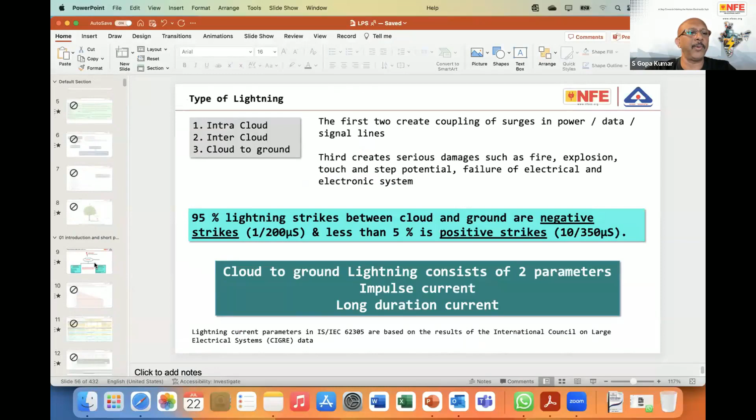So here the lightning protection level, anyhow we will discuss this in detail later. One moment. I have made some small changes, as I said, today because of my change in laptop it's creating some small trouble. Anyhow, let me go through it, then I will come to know.

Type of lightning: first of all, we should understand that there are intra-cloud, inter-cloud, and cloud-to-ground lightning. There are 3 types of lightning. So basically, out of these 3, when we talk about protection of structures, we have to think of cloud-to-ground lightning. The first two, inter-cloud and intra-cloud, create coupling of surges into the power and signal lines. The third creates serious damages such as fire, explosion, touch and step voltages, and failure of electronics. So today's discussion is mostly on cloud-to-ground lightning.

Also, we should keep in mind that 95% of lightning strikes between cloud to ground are negative strikes, and less than 5% are positive strikes. I have put here 1/200 microsecond for the negative strike, and for the positive strike 10/350 microseconds.

When we talk about lightning protection, we always talk about 10/350 microseconds. The engineers always say 10/350 because it's very heavy, very strong, the energy is very strong. It can create a lot of problems, and a normal system may not work in 10/350. All these explanations may be given.

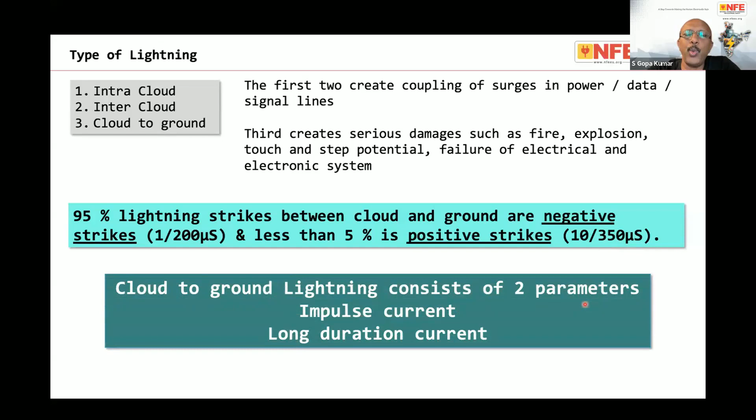Cloud to ground lightning consists of two parameters, or two types. The first one is the impulse current and the next one is long duration current. Impulse current means a current flow for a short duration of a few microseconds, for example, it goes from zero to peak and then reduces back to zero in a very short time. Long duration means the current will be smaller, but it flows for a longer duration.

The lightning current parameters in IEC 62305 are based on the results of CIGRE data. CIGRE, the International Council on Large Electrical Systems, publishes the data, and basically the data in 62305 are from CIGRE data.

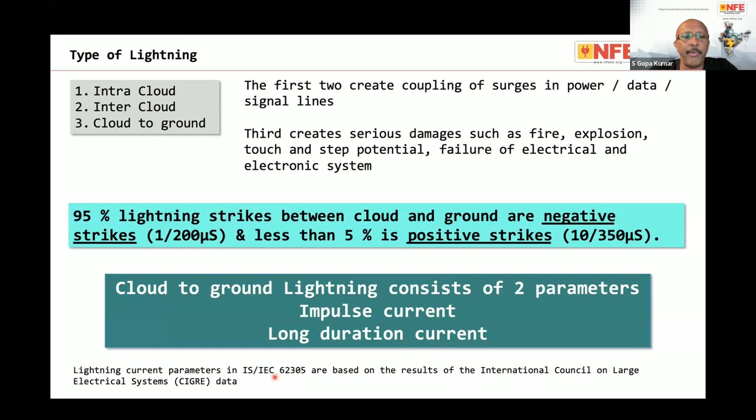Then you can see some of the examples here. All these are going to create trouble in the electrical installation. But today's topic, as I said, is mostly focused towards the building, that means the structure. So some of the examples - also the lightning strike which is closer to the building or closer to a line also creates trouble. These are very well included in the standard.

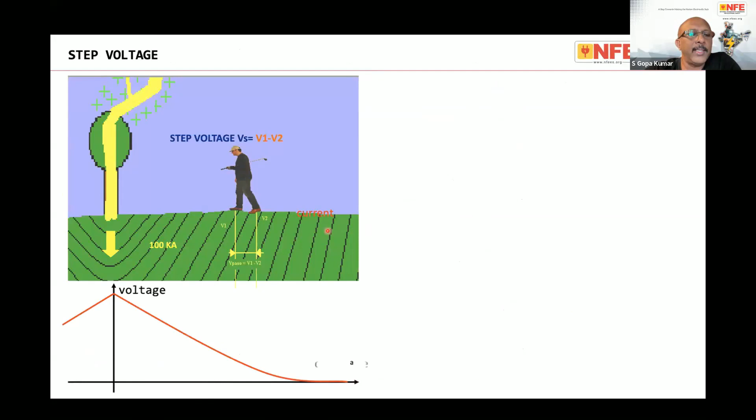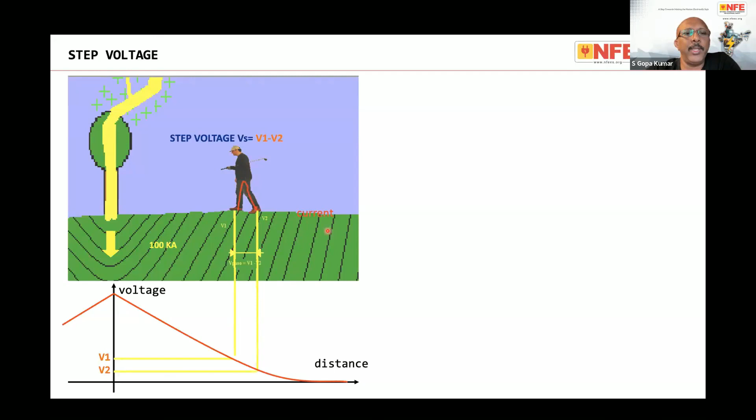Now, with respect to problems to human beings, one is step voltage. Once the lightning current flows through the soil, a voltage gradient is created, and a person standing across this gradient, through the legs, the current may flow. As a result, he may get injured. This is applicable for living beings - all living beings, step voltage is going to be a trouble.

Similarly, touch voltage - if somebody touches a metallic part which is energized due to lightning, and the person is standing on the ground and touching some energized part, the touch voltage will flow through the body and the person can get hurt. So touch and step voltage are the main reasons for accidents to human beings.

However, in our last webinar, we discussed these issues - protecting people outside structures was discussed very well. So today we are not going to explain these subjects. Today our subject is mainly for the protection of the building.

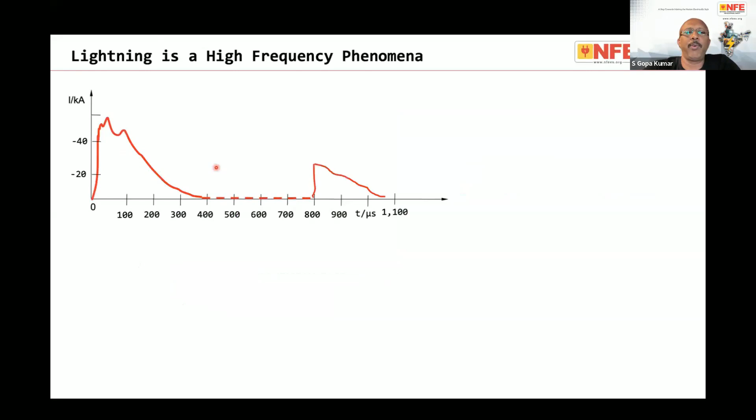A typical lightning strike consists of a main discharge, meaning there is an initial discharge or main discharge where a majority of the energy is discharged. Then after some time, there is a time difference between discharges, and there can be a subsequent discharge. A subsequent discharge means sometimes one subsequent discharge, or sometimes several subsequent discharges up to a maximum of 30. And there are chances where sometimes there is no subsequent discharge as well.

Now, this is the real lightning impulse or real lightning pulse. It consists of a main discharge and probably several, or one, subsequent discharge. Now, when we design a lightning protection system, the most important subject is protecting the building, protecting metallic parts, or protecting the building from flashovers, heating, arcing and fire. Here, the main discharge is the most important, which contains the majority of the energy.

The components used in the lightning protection system, such as the air termination, the conductors used, the earth electrodes or earth termination system, joints, clips, clamps - all those components should ideally be able to withstand the main discharge, because the majority of the energy flows during the main discharge.

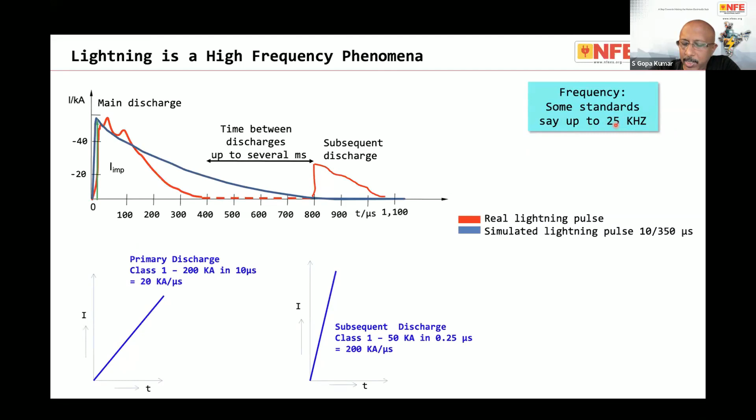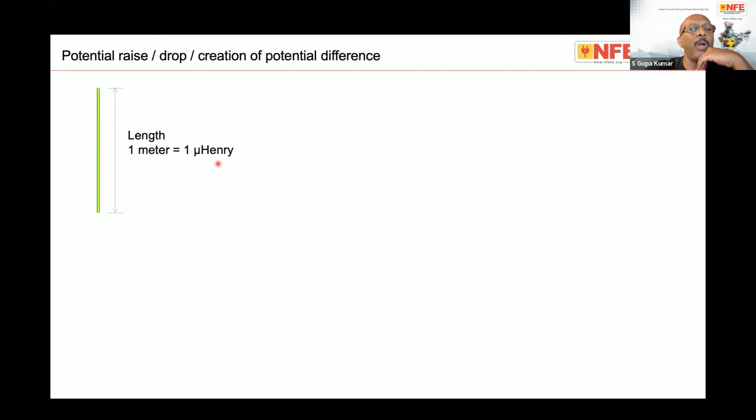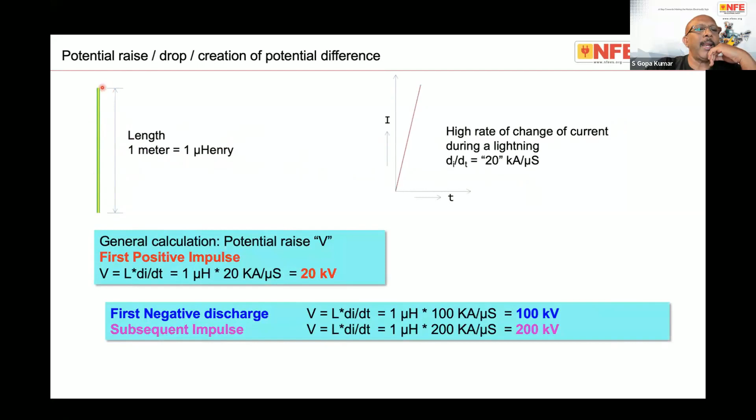Once this current flows through a conductor - I'm just showing a wire, let's say 16 square millimeters of copper wire, or 25 square millimeter copper wire, 1 meter long - this 1 meter wire will have approximately 1 microhenry inductance. Once the current of 20 kiloampere per microsecond flows through this 1 meter wire, a huge potential drop or potential difference is created along that length.

If the current is 200 kiloampere, 10 by 350, then the potential difference across the 1 meter wire length is about 20 kV. And if it's a first negative discharge, the potential difference created is about 100 kV. In case of a subsequent impulse, the potential difference in 1 meter of wire is about 200 kV.

This is just to explain that the longer the wire, the greater the potential difference created in it. So an enemy to lightning protection is more wire length. This is why whatever connection or down conductors you make in a lightning protection system, they have to be as short as possible. If you make a long wire, you're in trouble, because the potential drop in the wire will be extremely high, which will actually destroy the installation.

Basically, transient current flowing through conductors creates a high potential difference, resulting in flashover to other metallic installations - for example, down conductor to steel in RCC and PEB, metal facade, metal doors, power lines. So before the current starts flowing through the down conductor, it actually flashes over to all nearby metallic installations. And if you want to separate or keep the conductor away from metallic parts, you have to calculate distances, and sometimes keep it far away, which is practically very difficult.

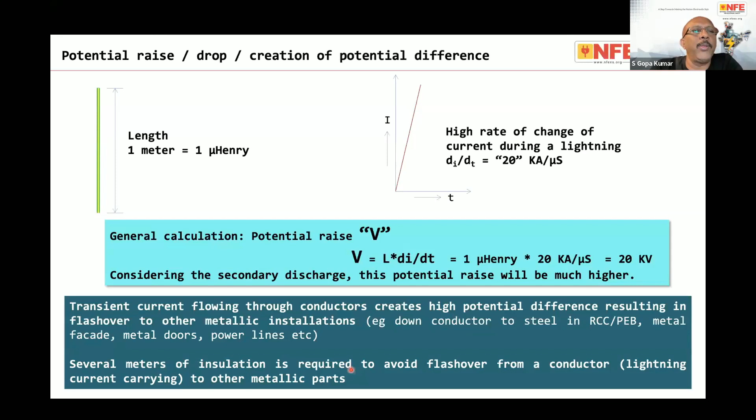So the simple conclusion is: length is an enemy, or wire length is an enemy, to lightning protection. More length means more problem; less length means your lightning protection will be more efficient. This refers to the length of the conductor where the lightning current flows. So once you design a lightning protection system, you should avoid unnecessary routing of the conductor. If you can take the conductor through a straight route, take it as straight as possible, and avoid bending and routing through different parts of the building.

Similarly, when the lightning current flows through a conductor, let's say one conductor, it creates a very high electromagnetic effect. Imagine the complete current is flowing through one conductor - you will have EMI effect, electromagnetic effect, at probably several tens of meters.

Now, if you have two down conductors, the current is divided into two, and the electromagnetic effect is reduced to half, for example. If you have multiple down conductors, let's say 10, the effect is reduced probably 10 times. And if the number of down conductors is, let's say, 100, the effective effect is much, much lower.

So the second subject of lightning protection, while designing, you should always consider that there shall be multiple down conductors. More down conductors is best for the building. The standard recommends a minimum number, but if you can make even more, the electromagnetic effect will be less. Electromagnetic effect is going to hurt your electrical and electronic installations.

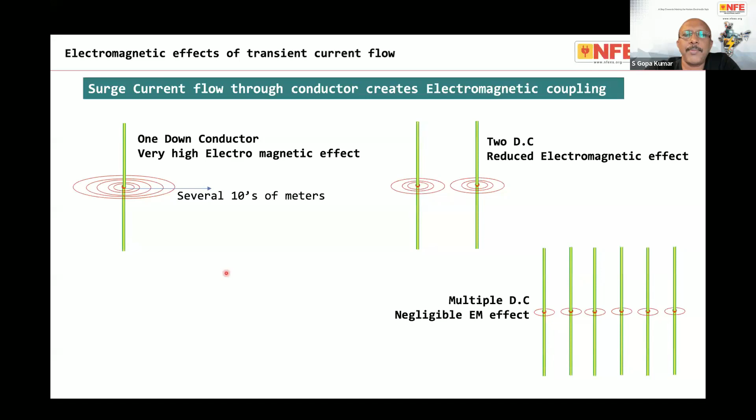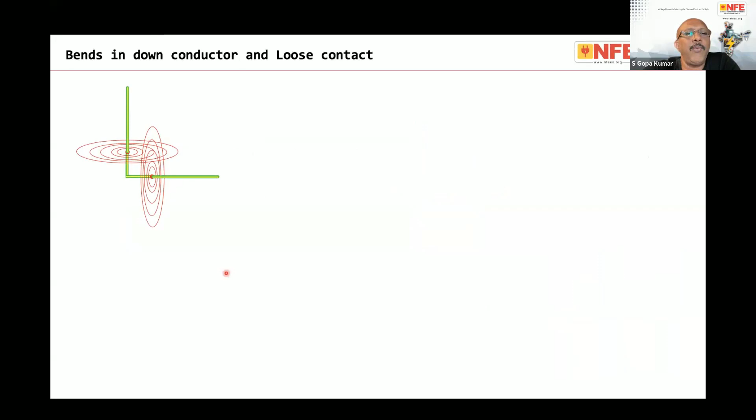So one, more length is a problem. Number two, less down conductors is a problem. Number three, if you have a bend in any conductor, say for example a down conductor, the opposing magnetic field on a bend will destroy the conductor. So bends must be avoided. If you have no other choice and want to make a bend, then...

there are some minimum bending radius we have to calculate and consider very well. If we make a 90-degree bend, even if the bend is made above a brickwork or concrete work, the forces created in this area will be enormous, so it can disturb or destroy the entire concrete as well. This has to be taken care of very well. Bend is an enemy to lightning protection. So the recommendation is to have the conductors as straight as possible.

Then the last one is loose contact. Loose contact will create a big problem. It is not like in 50 hertz AC where loose contact just creates heat. It's not like that in lightning, because lightning has a parameter called specific energy. Specific energy is scientifically connected to the resistance of the joint - a joint resistance of 1 ohm produces an equivalent heat of about 10 megajoules during a lightning current of 200 kiloampere flowing through it. So the amount of heat produced in the joint will be enormous.

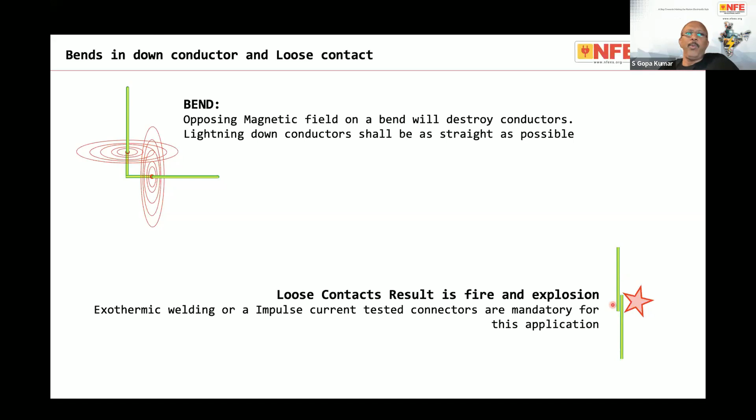Of course, in Cape, all of you know my company is Cape Electric. So in Cape, we have a design team - about 15 or 16 people in our design team, and we do lightning protection design.

So once we get the drawing from the client, we ask a lot of questions to the client, in order to ensure that the design is made in a good way. But most of the time, the clients say, why are you asking so many questions?

Your competitor or the other company, I gave the drawing at 10 o'clock and they finished the design at 11 o'clock and gave it back to me. And your company is taking 3 days or 5 days to make a design. You are lazy, you are very slow. These are the comments we used to get.

But please note that designing lightning protection is not a simple job. We have to really understand it in depth, and then only we can do it. Our engineers are trained to do proper designing. That is the reason they ask questions to the customer or the designer, and try to make a good design. So it may take sometimes 2-3 days or even more.

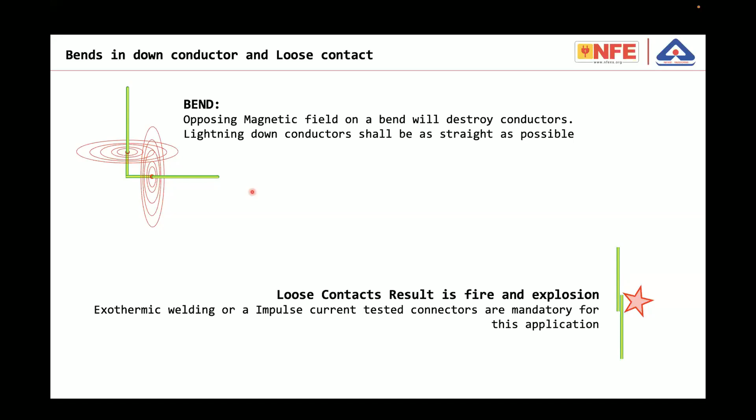So I just try to explain the system with a simple explanation. Not for an engineer, this explanation may not fit an engineer, but this explanation sometimes works for a non-engineer, as well as people who have little knowledge of electrical engineering. So I try to compare. This was made by Professor Chandima Gomes a few years back, I think 15 years back. He was explaining it this way and everybody understood. Then I also started explaining in the same way. Let me try to do it again.

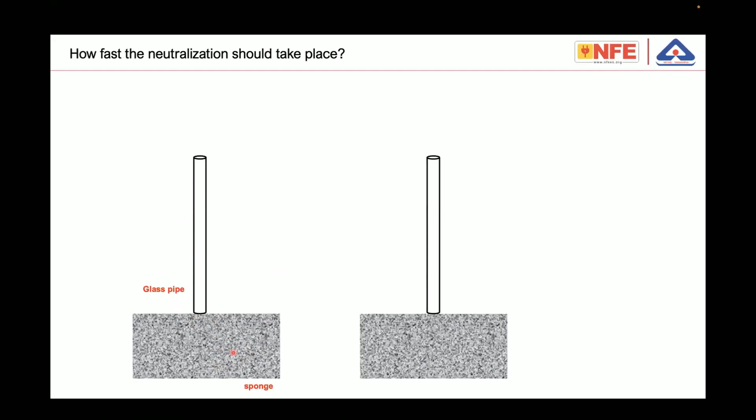Imagine you have a glass pipe, a sponge, and one bucket or mug of water. You pour the water slowly into the glass pipe. So you know what is going to happen. Some of the water goes to the sponge and absorbs it, and the rest stays inside the glass pipe, and after some time the whole water goes to the sponge. It takes some time, probably 10 or 20 seconds, for the water to go to the sponge fully.

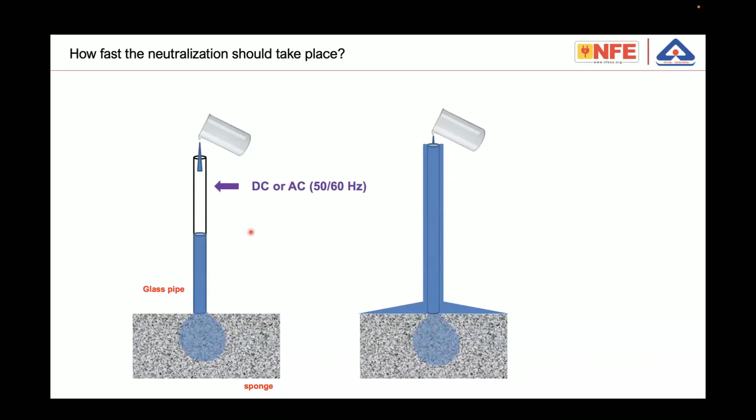On the same sponge and pipe, if you try to pour the water quickly, very fast, then what happens is the pipe overflows. Before the water reaches the bottom, the whole thing overflows, and only a little amount of water goes to the sponge. Most of the water overflows. This is practically what happens in case of a DC or a 50 hertz current flow - the system on the left side, where the current is slower. In case of a transient or lightning, the current flow is very quick, very fast.

The system is not just like what we think. In case of DC or AC 50 hertz current, probably one conductor is enough to carry the current, whereas in case of lightning current, this same idea will not work. In the first case you can see the limited potential rise, and in the second case, where the current flows like water poured very quickly - imagine a transient current flow - unlimited potentials are created.

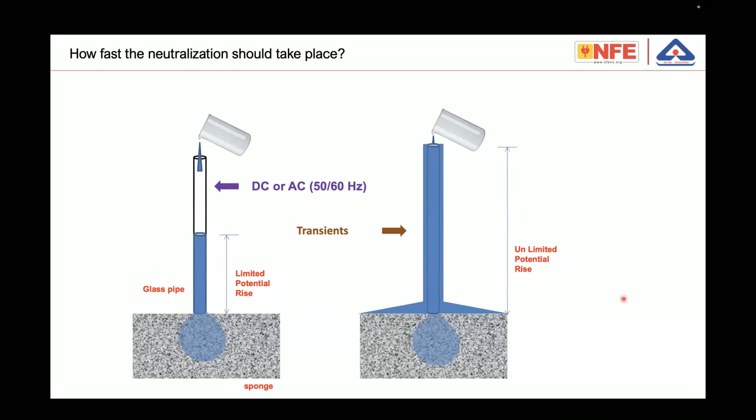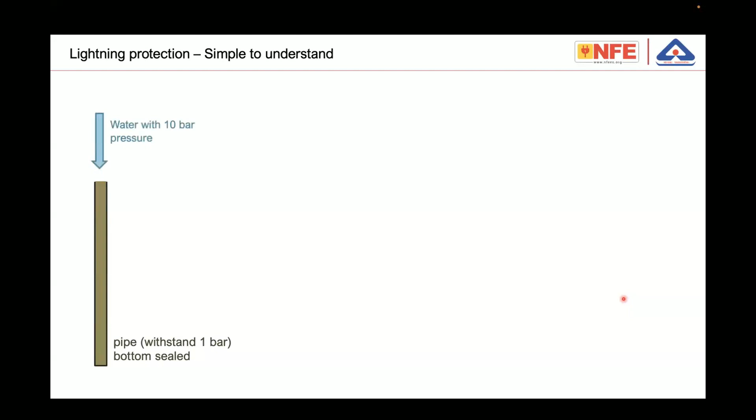So I also try to explain it in another way. Earlier we were doing some classes for school children, where these figures were used, so I will try to explain again. I'm sure all our participants are engineers, but still, just to understand the system: you have a pipe, let's say a plastic pipe, which can withstand 1 bar pressure, and its bottom is sealed. And you try to pour water with 10 bar pressure.

You know what happens - once you pour the water, at the top itself, it explodes. In the second case, the same pipe, imagine there is a small hole in the pipe, but the pipe can withstand only 1 bar pressure, and you are putting water with 10 bar pressure. A little bit of water goes inside, but then immediately the pipe explodes. Third case, the pipe is completely open - you have an open pipe that can withstand only 1 bar pressure, but you are pouring 10 bar water. Of course, the pipe is going to explode.

So these three pictures can be explained in such a way that the first one, on the left side, is like one down conductor used, and the down conductor is not terminated to the earth electrode. Lots of buildings in India have a single rod lightning protection, and most of the time the down conductor is disconnected somewhere. As a result, at the top itself, at the air termination, the lightning current is going to flash over and destroy the whole installation. Similarly, the next one - imagine the single down conductor is connected to the earth electrode, but with a very inefficient connection.

In that particular case, there will be a flashover somewhere again. And the third one, there is a single electrode. Most often the ESE devices which you see in the country have one air termination, one down conductor, and one earth electrode. Once the current flows, the whole installation will be destroyed. There will be a flashover.

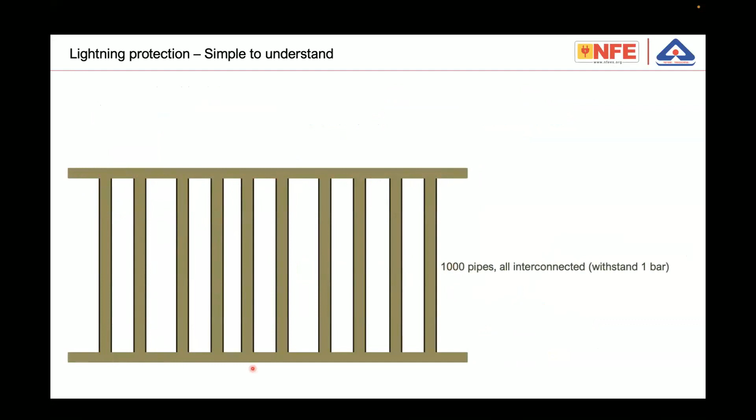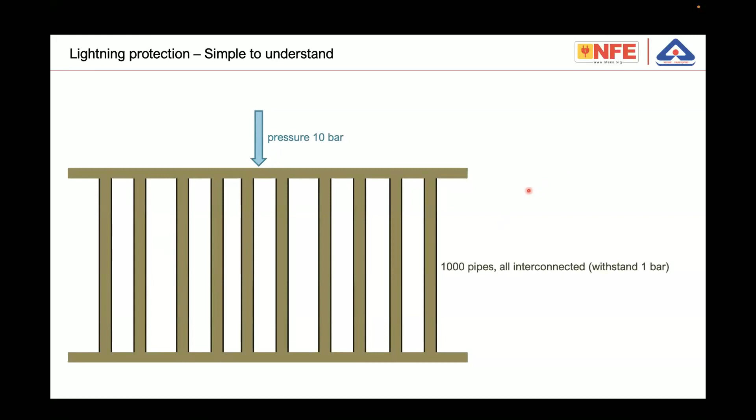So what is the solution? The solution is something like this. Imagine you have a larger water tank at the top with interconnected pipes, these gray ones. Now if you put high pressure water, let's say each pipe can withstand a good amount of water, but the water we pour is limited, only one bucket, not so much. So in this case, a bucket of water will flow through all the pipes, and the chance of damage is very less.

So this can be explained as what we are supposed to do to the system. As I said, this explanation is for school children, not for engineers, but sometimes the questions arise. At the top, you have an air termination mesh plus naturally available steel installation in the roof.

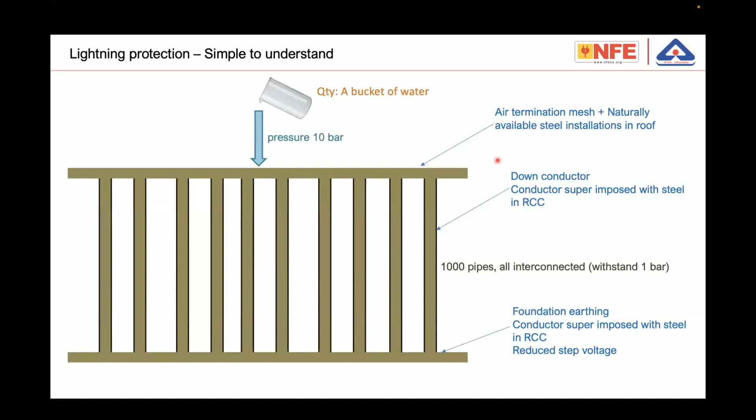So we make a very good equipotential bonding at the top with a lot of metal interconnections. Then there are several down conductors, and a very good earth termination system. Basically, this is achieved by interconnecting different metals. This is the system followed globally as mandatory for the last several years.

This concept means a large air termination system consisting of rods, horizontal conductors as a mesh, everything interconnected. Then there are several down conductors, and finally a large earth termination system, either as a ring conductor or a foundation earth electrode. This is what is explained as the lightning protection system in the National Building Code as well as IEC 62305. But please excuse me, I explained it as an example.

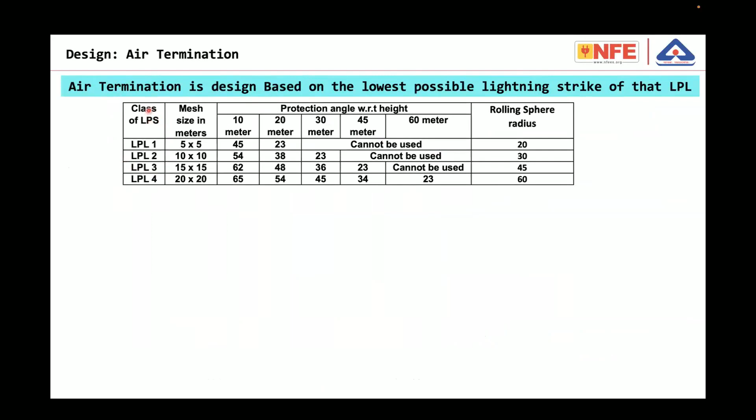Now, air termination. The first job of lightning protection is to design the air termination system. You can see here lightning protection class 1, 2, 3, 4. Air termination is the system or the method or the interconnected metallic arrangement which we make at the top of the building in order to avoid a direct lightning strike into the building.

The first method, in case of a flat roof building, you can make a mesh. The size of the mesh is provided in the standard. You can also go for a vertical rod, which offers a certain angle of protection, not like 200 meters or 100 meters. Each rod offers a certain angle of protection, and you can also use the rolling sphere method.

Once we talk about the rolling sphere method, people always ask, what is the basis of the radius 20 meter, 30 meter, 45 and 60? What is explained in the standard is R equals 10 into I to the power 0.65. This is the rolling sphere calculation included in the standard.

And this I depends upon the charge in the cloud. This I is related to a parameter you can see here: the lightning downward leader comes, then there is an upward streamer or the answering leader from each grounded object, such as a tree, or such as this particular transmission line.

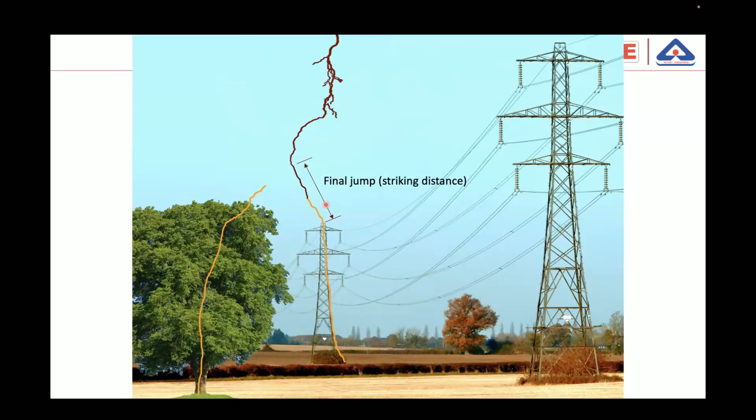Now, the lightning strike gets connected to the transmission line, and the final jump is called the striking distance. The rolling sphere or electrogeometric modeling is made based on the assumptions or calculations of the striking distance, which is calculated based on the charge or the expected lightning current, let's say for example 200 kiloampere. If we apply that formula, we get the value, and based on the striking distance, the rolling sphere radius is calculated.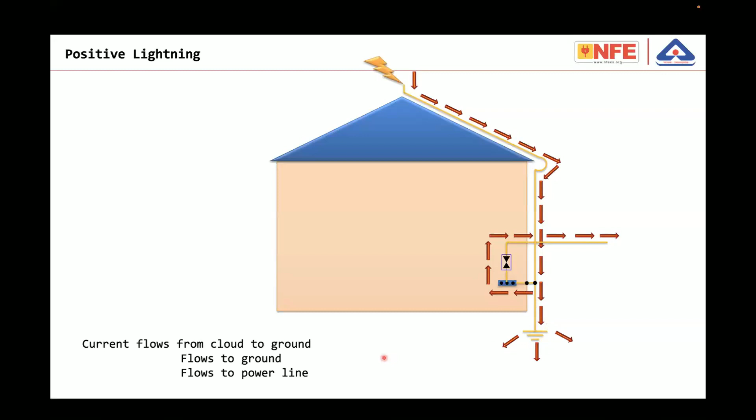Now, positive strike, just as an example, because people always think lightning current comes from the cloud and goes to ground, but actually it is not always like that. In a positive strike, the current flow will be from the cloud to the ground, and also from the place where lightning struck to all the metallic installations connected to that structure. The direction shown is just an example. Similarly, in a negative lightning strike, the current flow will be opposite. Sometimes people try to explain that you need one SPD for one direction and another SPD for another direction. These are actually wrong.

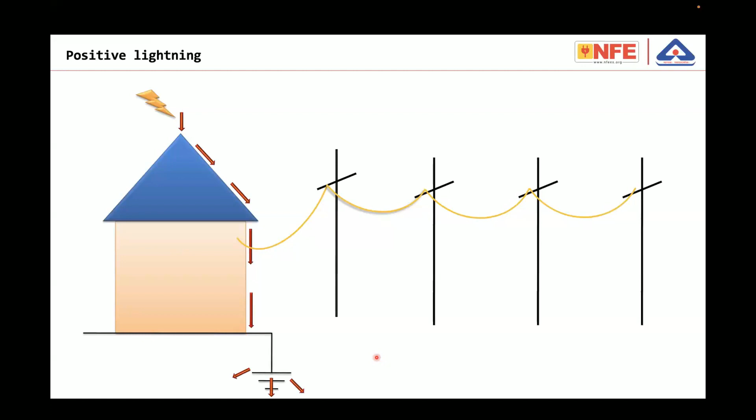The devices and components used in lightning protection are capable of handling current flow in both directions. Positive lightning current flows in one direction, negative in another. Looking at a building with a lightning strike, the current flows to the ground and to connected services, flowing outward to nearby buildings. In case of negative strikes, it is the opposite. So with positive and negative strikes, you must be careful, as the current flow direction is opposite.

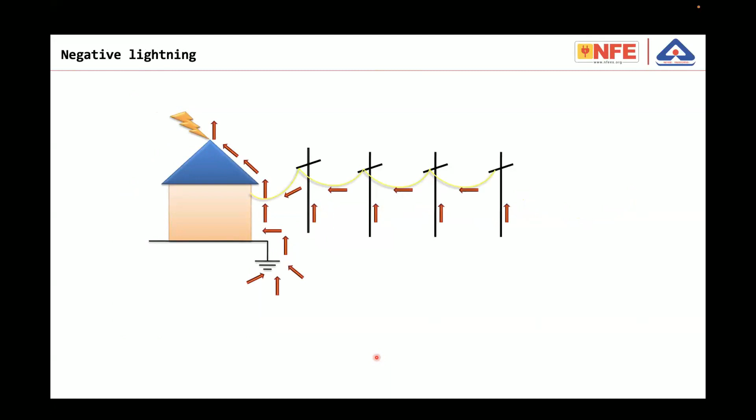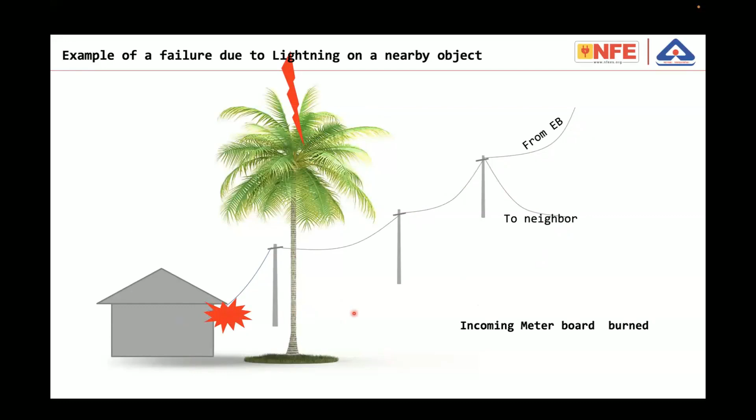Consider lightning striking into a nearby object. There is a building with a low voltage line connected, typically applicable to low voltage consumer premise houses. Let's say there is a tree and lightning has struck it. What we generally read in the newspaper is that as a result of this lightning strike, the electrical and electronic items in the house burn, the incoming meter board burns, then the DBs, switches, inverter and TVs fail, and at the neighbor's house some electrical or electronic appliances also fail.

This is what generally happens. Once the current flows through this particular tree, there are 2-3 possibilities. One is from the tree to a metallic installation, there can be a side flash. If there is no side flash, the current flows through the ground, and at the ground a high potential is created. The potential rise at the ground will be extremely high with respect to a faraway place.

So low voltage is with respect to the faraway place. If we look at the connected service, that means the 230, 400 volt line, it is connected to earth, which is the neutral earthing of the transformer, far away from the building, imagine 200 meters away. So for this particular power line, the building and nearby area are at a high potential, while the line 200 meters away has a totally different potential. So the potential difference becomes extremely high.

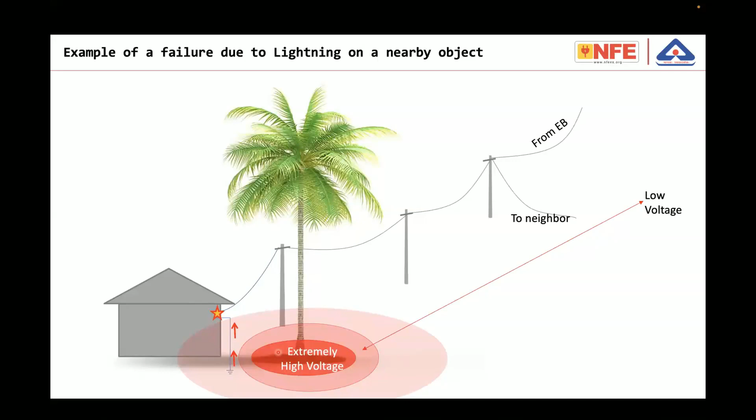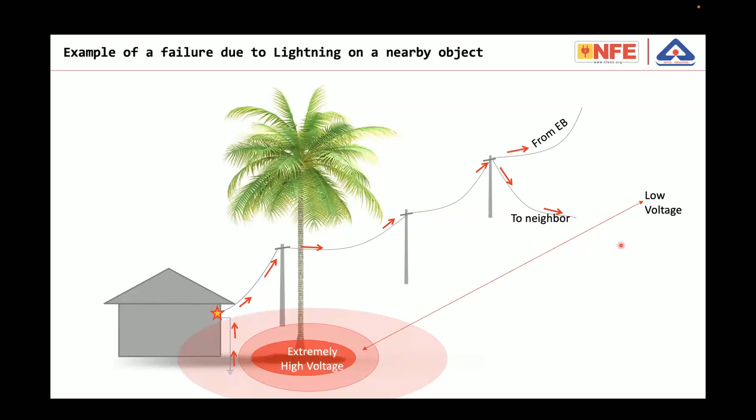As a result, it breaks the insulation of the electrical installation, by way of arcing or spark over, and some electrical items get burned. Then the current flows back to the source through these connected services. A partial current also goes to the neighbor's premises, meaning all connected lines will experience a partial lightning current. So the house nearest to the tree will have major failure, and all the connected neighbors' houses will also have failures. You can find such examples very well.

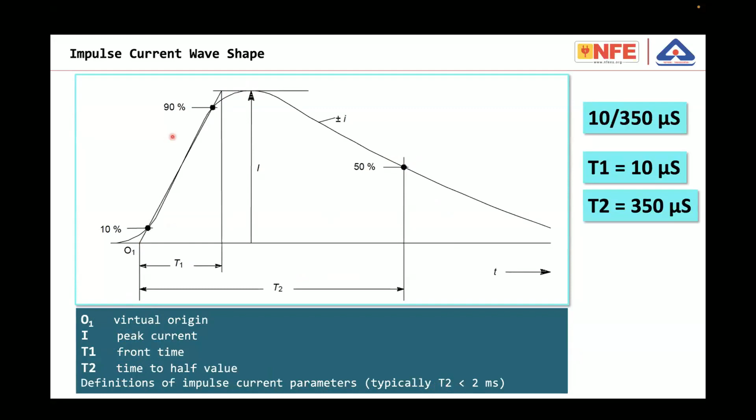Sometimes people try to explain that it is not exactly 0 to 100 percent, it is in this way or that way, but actually that's not important. Detailed analysis of 10 by 350 isn't going to help anyway. So O1 is the virtual origin, as you can see here. I is the peak current, shown here. T1 is the front time, and T2 is the time to half value. Typically, by definition, the impulse current parameter T2 is less than 2 milliseconds, but for standardization, 10 by 350 is taken into consideration.

Similarly, the long stroke, you can find the picture in IEC 62305 part 1. A long stroke is a cloud to ground current flow which has a lesser current compared to an impulse, but the duration is long.

So it's a long duration stroke, and it consists of charge. Basically, the charge is going to heat up, or has got certain effects. The positive or negative and long duration strokes are analyzed very well in the standard, and the effects are also included for the designer to design an appropriate lightning protection system.

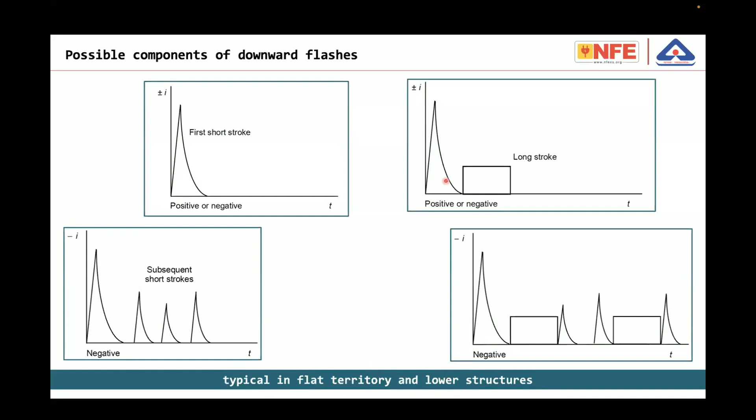For example, here are possible components of a downward lightning strike. It can be only one positive or negative strike, or one impulse plus a long duration stroke, or multiple short duration strokes, where the current is always negative, not positive. Or there can be one initial strike and multiple strikes, long and short duration, where the strike is always negative. These are typical in flat territory and lower structures, where the height of the building is lesser. You can find these details in 62305 part 1.

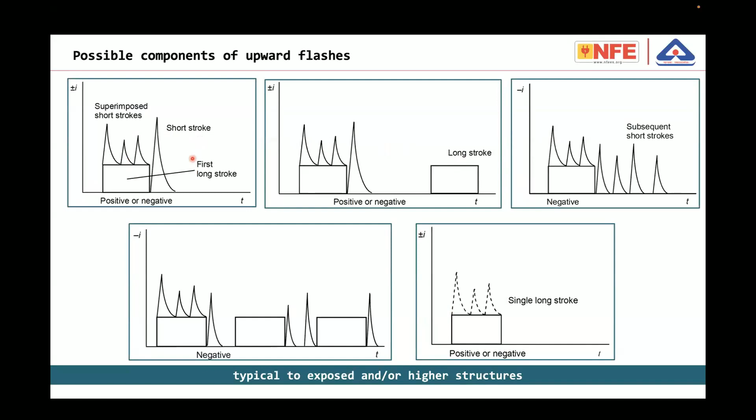Similarly, the shapes are analyzed differently for higher, exposed structures. These are the different wave shapes, positive or negative strike. You see here one impulse, then a long stroke and a short stroke. This is for the designer to understand the application, and if necessary, take extra measures. For example, a long stroke can create a typical kind of failure. If the designer knows the building is high-rise or exposed, say on a hill, he can put extra measures in the air termination or down conductor, reducing such a possibility.

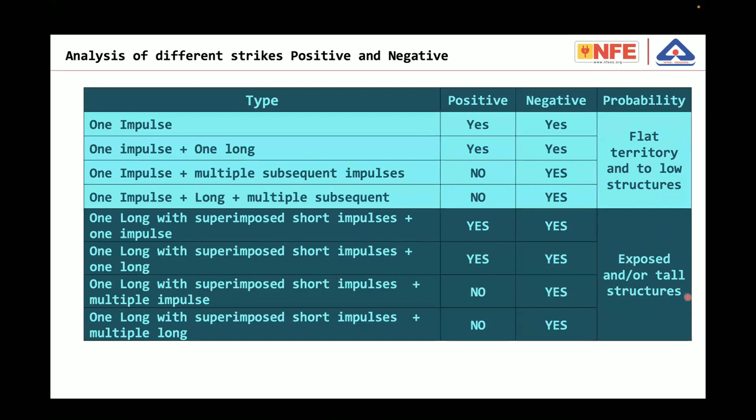This is high-level knowledge, but designers should have some idea about it so the design can be made more perfect. The 62305 part 1 also gives this kind of table. For example, type 1 impulse: if the lightning strike is only one impulse, it can be either positive or negative polarity, possible in flat territory and low structures. In case of exposed and tall structures, there are other possibilities, which I've already shown in the picture, so let me skip that.

So if a customer wants a higher current withstanding capacity, he can design for it; the tips are given in the standard. But as per standard, level 1 protection considers up to 200 kiloampere. If you want a higher degree of protection, you need extra measures. The impulse current consists of a peak current in amperes or kiloamperes, a charge, specific energy, and rate of change of current.

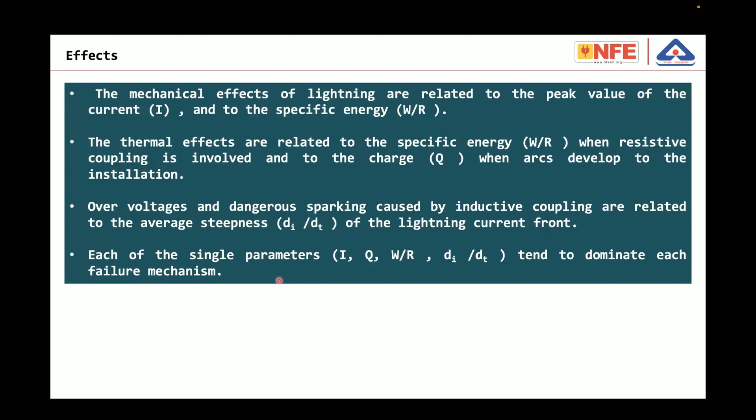In case of level 1 protection, 200 kiloampere is the current. The specific energy to be considered is 10 megajoules per ohm, meaning approximately the heat produced in 1 ohm resistance. Once a current of 200 kiloampere, 10 by 350, flows through 1 ohm resistance, the approximate energy or heat produced is about 10 megajoules. That is what it is.

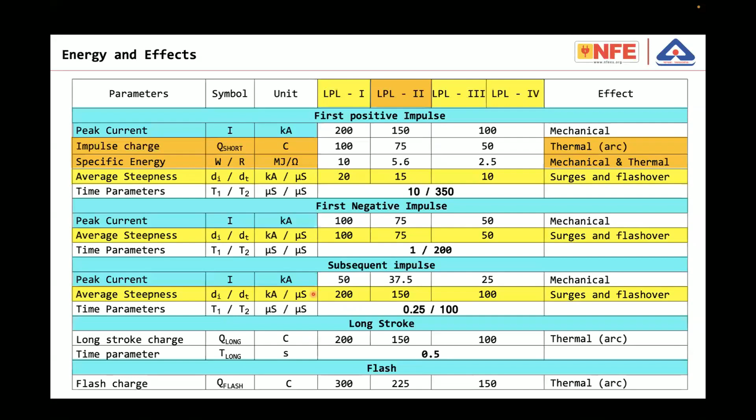So these values you can find from the IEC 62305 standard, but to understand and implement it is an engineer's job.

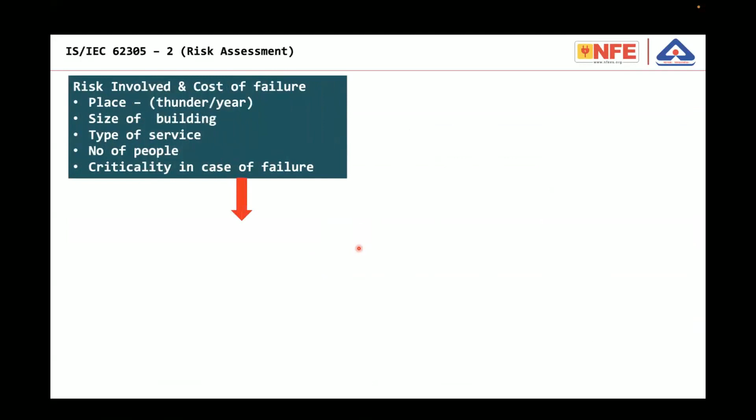So these are the contents up until now, of part 1 of IEC 62305. Then we go to part 2, which is nothing but the risk assessment.

In order to design a lightning protection system for a building, the purpose is finally to protect your building. If the building is not protected, you are going to have some economical loss. So we have to evaluate what kind of economical losses are expected in a building, and with how much minimum cost you can avoid the economical loss or failure.

So for this purpose, risk assessment is made. Here on one side, the risk involved and the cost of failure is calculated.

For example, the location of the building, whether it is in a hilly area, the number of thunderstorm days, is it near a high-rise building, is it near a tree, is it near a transmission tower - all these things are considered. The size of the building is considered, the type of services are considered, the number of people are considered, and criticality in case of failure. All these are considered, and the risk involved in a typical building is calculated.

Also, the cost of failure is calculated in a scientific way in IEC 62305 part 2. So by making this particular calculation, on the other side, you have the minimum required protection, so you can go for a lightning protection system at the minimum cost without exceeding the tolerable limit.

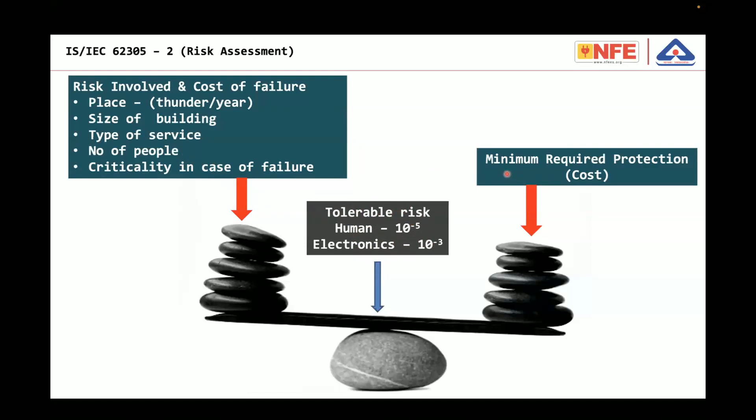So the tolerable limits are given in the standard. Now the risk assessment is made in order to find out the minimum expenses with which a reliable lightning protection can be made.

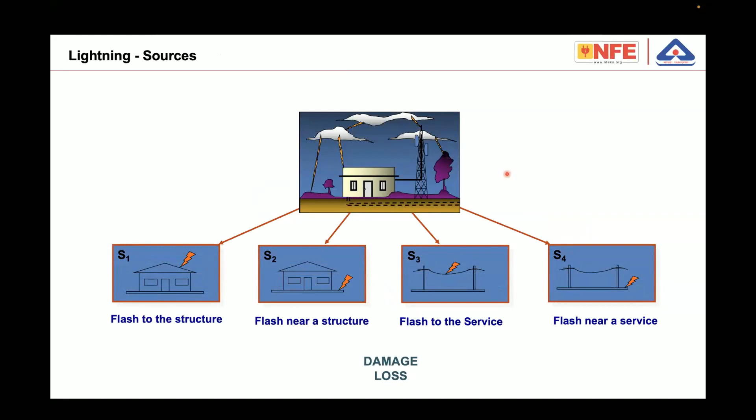The considerations are, for example, there are 4 types of lightning which can create failure in a building: S1, S2, S3, S4 - flashes to the structure, flashes near the structure, flash to the service, and flash near a service. These are the 4 causes of lightning which can create damage, and the damage can create a loss.

Basically, each of these sources - for example, source S1 means a direct lightning strike into a building, directly on the building. It can create injury to living beings, physical damage, and failure of equipment. So there are 3 types of damages a direct lightning strike onto a building is going to create: D1, D2, D3 - injury to living beings, physical damage, and failure of electronics.

Now D1, injury to living beings - how does this happen, and what kind of loss do we have? First one is loss of life, and loss of economics.

So in case of D2, physical damage, the losses are classified into 4 types: loss of life, loss of service, loss of cultural heritage, and loss of economics. Out of these, loss of cultural heritage is a very important subject which we generally neglect.

In a normal building, you don't need to consider loss of cultural heritage, whereas in culturally important or heritage buildings such as temples and forts, we have to be very careful while designing the lightning protection system. Similarly, failure of electronics, damage number 3, is going to create loss of life.

For example, in a hospital, an equipment failure may be harmful to a person. Then loss of service means an electronics failure may be destroying a service to a building. For example, the telecommunication room or public telecommunication line has got broken or burned and failed.

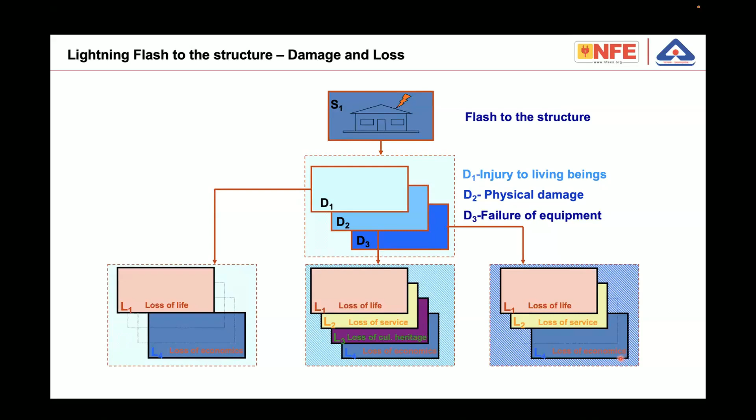As a result, the service is lost. For example, the telecom tower has got a lightning strike and the signal is lost. That is what is told as loss of service. The 4th one, loss of economics, means the direct amount of loss which we are going to have.

Similarly, S2, flash near the structure, is not going to create the first 2 damages. The flash near the structure is going to create a failure of equipment directly, and failure of equipment is related to loss of life, loss of service, and loss of economics.

S3, for example, a direct lightning strike onto the connected service, is going to again create all 3 damages: injury to living being, physical damage, and failure of equipment.

Sometimes people ask how a strike onto a service or a flash on the power line is going to injure people. Of course, if somebody is using some electrical appliance, the person will have a problem. So he can be injured.

Physical damages are also possible, meaning the lightning strike on the service line, on the 230-volt power line, has destroyed the entire distribution board, for example. Then failure of equipment. So these 3 damages are expected due to cause S3, and out of these 3 damages, we can have loss of life and loss of economics.

D2 again covers all 4 types of losses. Then in case of failure of equipment, all 3 losses apply.

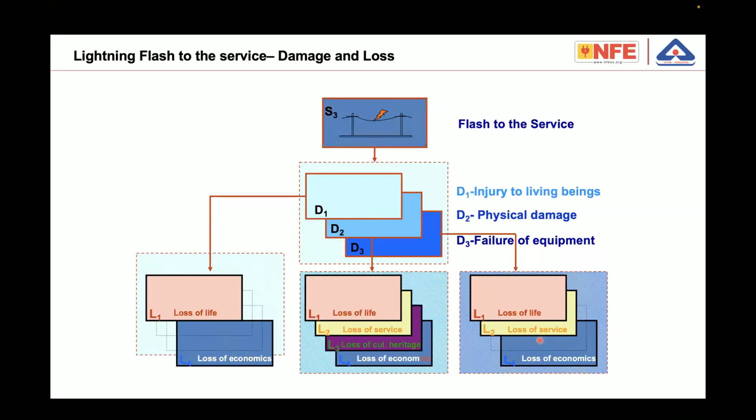Similarly, the last one, S4, flashes near the structure or near the service, can also create a failure of equipment. The damage is failure of equipment, and the losses are loss of human life, loss of service, and loss of economics.

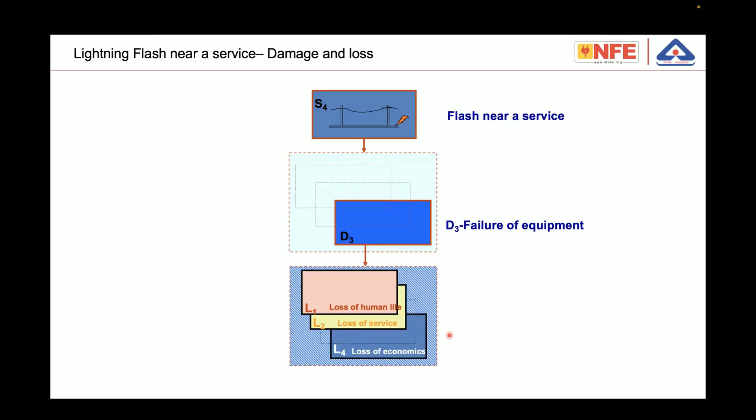The purpose of showing these slides and explaining the risk assessment is that we generally get requests from customers to make a risk assessment. Then we have software where we put the values, maybe 20 questions, and the software gives you lightning protection level 1, 2, 3, or 4.

What I am seeing in the market is that the purpose of making risk assessment is to find the minimum expected protection, or the minimum level with which a building can be protected. But most of the time, the argument is: you are giving level 3 protection, but all the other competitors are giving level 1 protection, how come? So the answer is, please understand that the risk assessment is to find out what minimum is required.

Now again, going back, there are 4 types of sources and 3 types of damages. Each damage is related to a loss, for example L1, loss of human life. S1, S2, S3 each create this particular loss of human life.

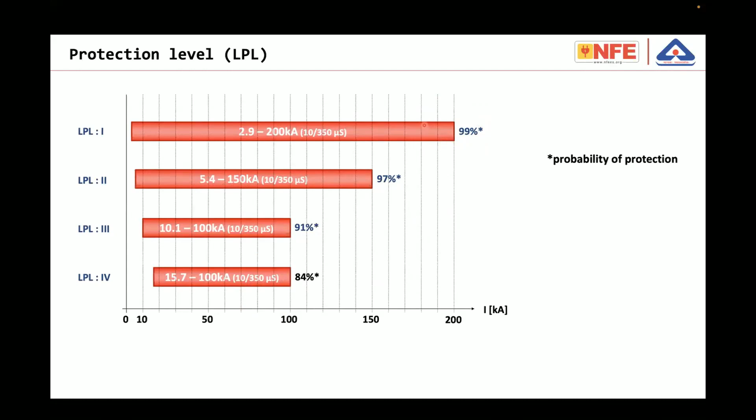Low-rise hospitals, hotels, explosive zones in the industry and chemical sector, fuel retail outlets, gas stations, compressor stations, and similar installations - you go for level 2 protection. Then buildings such as schools, banks, residential buildings, temples, churches, mosques - you go for level 3 protection. This is the recommendation in the National Building Code.

But the idea is not to find out the maximum protection. It is to find out the minimum protection required for a building.

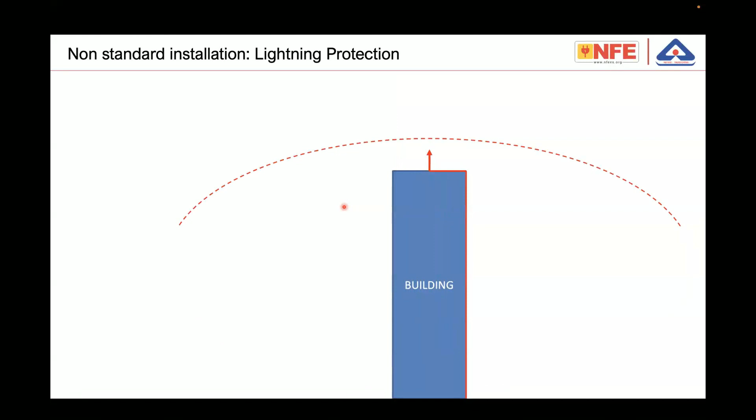When it comes to lightning protection, always the challenge is non-standard lightning protection, because the discussion is not complete without the early streamer emission device, which is called in India the advanced lightning protection system. My conclusion is this is a way of fooling people. The claim is it protects several hundreds of meters, 100 meters or 100 plus meters of radius.

It requires a very simple single down conductor, 70 square mm insulated conductor, running from the top of the building to the bottom, and then it is connected to one earth electrode. This will supposedly protect the electrical installation or the entire building from lightning.

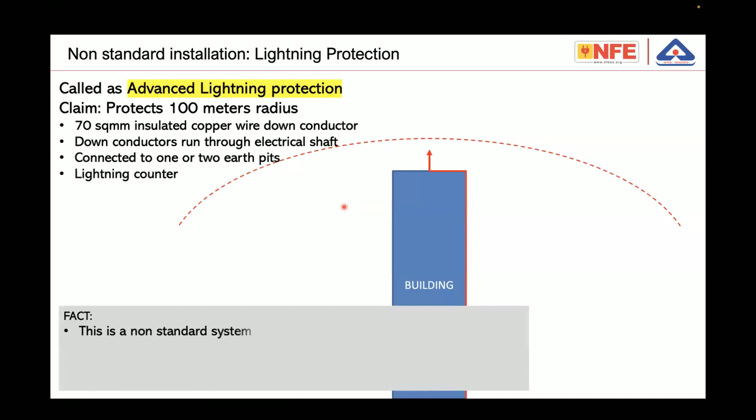Of course, this is a non-standard system. The National Building Code recommends not to use this system, and it will not provide any safety. Even the French standard does not explain lightning protection in this fashion. One down conductor and one earth electrode is a disaster. We call this the first disaster - the story behind the enhanced protection radius of the ESE device.

The second disaster is the single down conductor disaster. Most often these devices are installed in multi-storied buildings, and the down conductors are routed through the electrical shaft.

I had a lot of discussion in the last 15 years with builders. Once when I tell them don't use this particular device, they say no, the X company from France or the Y company from Australia, they are very reputed worldwide. So they provide one rod protecting me and all my neighbors, and the down conductor can be routed through the electrical shaft.

So please, for such arguments, please download the French code NFC 17102 from Google - you can download it free of cost, the English version - and please go through it. This single down conductor, single earth electrode is actually, these companies are - sorry to use the word - they are actually cheating the customers.

Now, coming back to the regulation, for your information, the Central Electricity Authority published the regulations 2023 on 8th of June. In the earlier regulation, chapter 3 contained the code of practices that may be followed - it was only a recommendation. But in the new regulation, save otherwise provided in these regulations, the relevant standards, including National Electrical Code and National Building Code, shall be followed to carry out the purpose of these regulations.

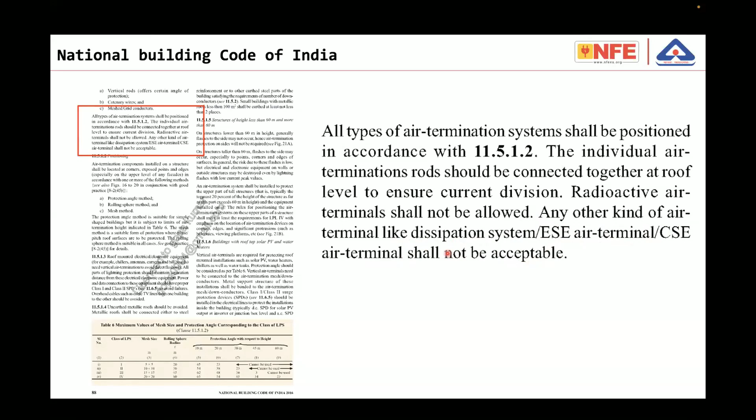It means the National Building Code has very clearly stated that the NBC does not consider these non-standard items in lightning protection design. So if you use ESE systems in buildings, solar PV, or industry, please note that now it is illegal. Not only now - earlier also it was illegal, but there was some confusion. Now anyway, it's very clear that it's illegal.

Now the values, let me skip it. I will try to conclude the presentation a little bit quickly. As I explained earlier, the lightning protection system consists of an air termination system.

Air termination system can be made as a horizontal grid, like on the left side where I am moving the cursor. The size of the grid depends on the lightning protection level - level 1, 2, 3, 4. For level 1 it's 5 by 5, for level 4 it's 20 by 20. Similarly, protection angle is with respect to height, and for LPL 1, 2, 3, 4, the heights are given. There is a picture in the standard you can refer to, find the angle of protection, put a rod, and calculate the angle of protection.

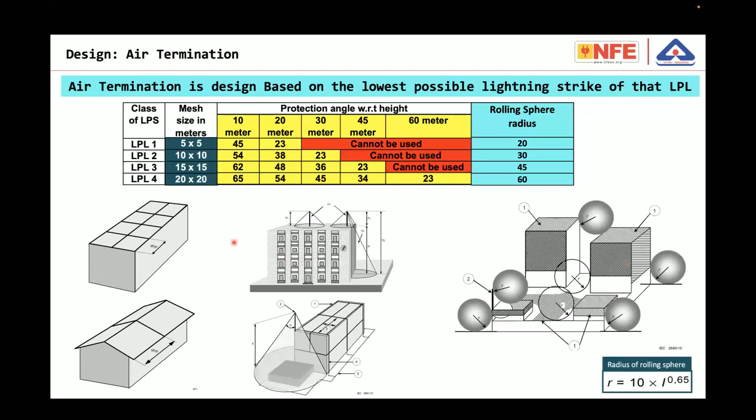Similarly, the rolling sphere method - the rolling sphere radius is based on the striking distance, which is connected to the expected current, and the formula is also given in the standard. So the rolling sphere method is a technique used to find the probable place of a direct lightning strike. The rolling sphere does not protect your building directly - it's only a technique to find the probable place of a lightning strike. In those places, you can use either a mesh or a rod to protect your building.

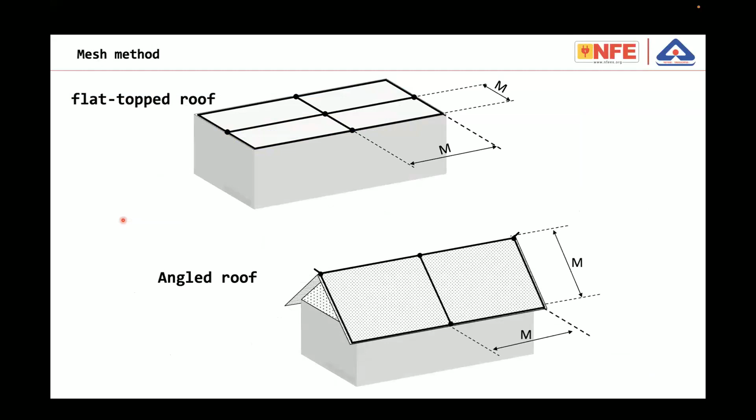So basically for a flat roof building, you have the mesh, the size of the mesh is given. Also for an angled roof, you can use the same technique - the mesh size is given.

Unfortunately, we can't find this kind of an installation in India. That's why I referred to the Chinese installation.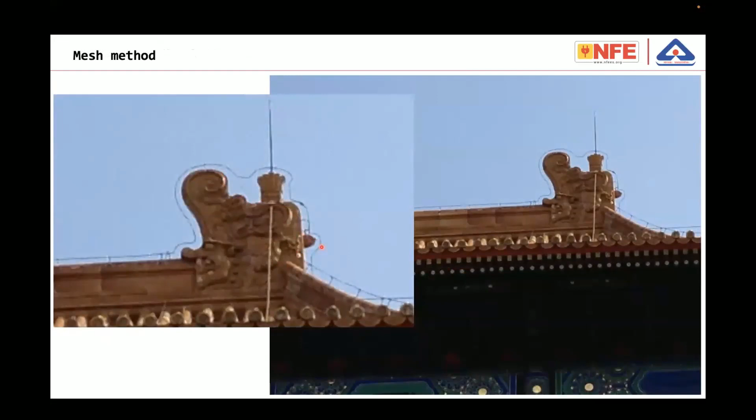The protection angle, you can find this table from the standard, and you make the approximate angle as protected. For example, here in this case, the protection angle depends upon the height. A building with a rod at the corner will have two heights, one towards outside, one towards inside.

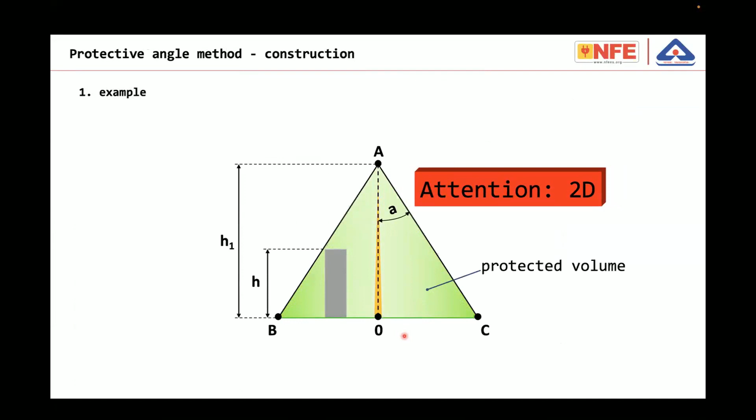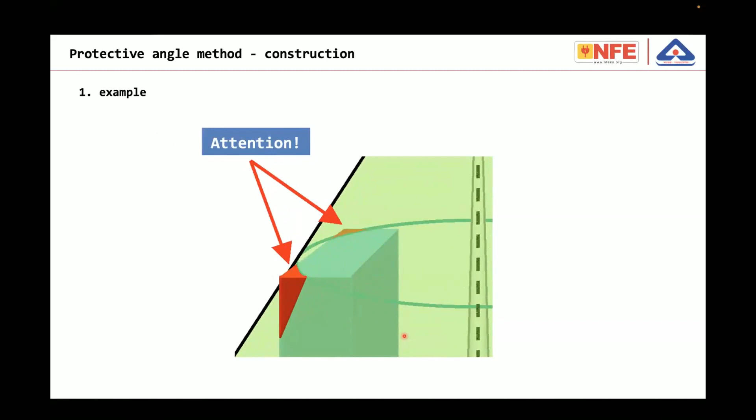Both have different angles. So when you make the protection angle, what we need to consider is that the protection angle is considering a 2D building, but actually our building is 3-dimensional. So if we don't take care of the corners and edges, lightning will always try to go to the corners and edges of an object. So the most important thing is to protect the corners and edges of a building.

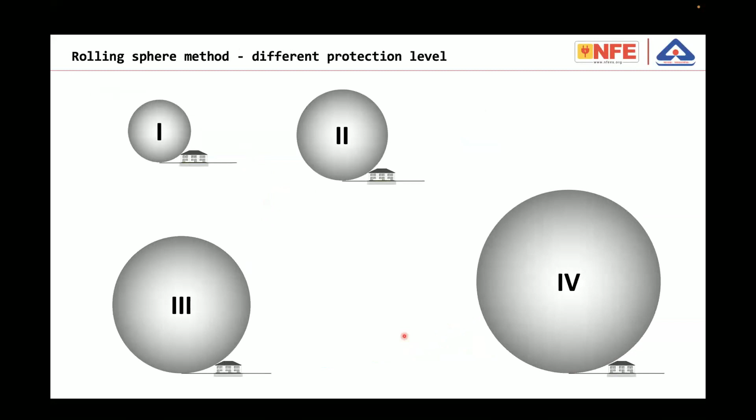Now, let me explain a little bit more about the rolling sphere method. There are 4 diameters or 4 radii explained in the standard: level 1, 2, 3, 4. Basically, this electrogeometric sphere is used to find out the probable place of positioning of a rod, for example.

In this particular case, positioning simple rods at 4 corners or 4 points of the building protects the building from a direct lightning strike. Of course, all the 4 vertical rods must be interconnected, and there shall be multiple down conductors.

So here, all the areas shown in red color are the places where a direct lightning strike is going to occur, and in those areas we are supposed to have either a mesh or a rod.

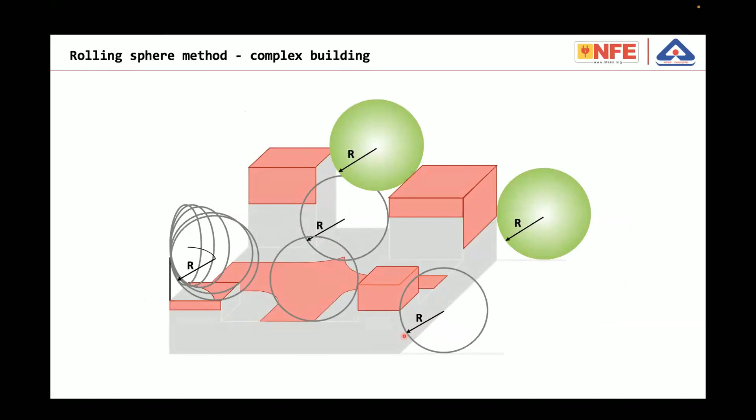So in a typical building, lightning protection will look like this. You see a typical building with a solar rooftop installation. There are some rods in order to protect the solar rooftop.

Then there is a mesh which interconnects the entire building, running through the corners and edges of the building. And then there are down conductors, and finally the down conductors are connected to a ring earthing, an earth termination system, which is like a ring.

The 2 techniques which can be applied here are the protection angle as well as the rolling sphere. Both can be applied to ensure that lightning does not strike either the building or the rooftop appliances.

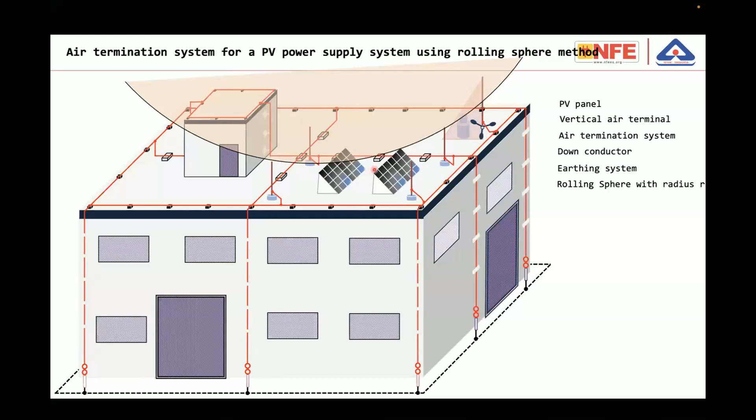One subject which we always want to consider is the separation distance. Anyway, we will not discuss it today. We will discuss separation distance in a different webinar.

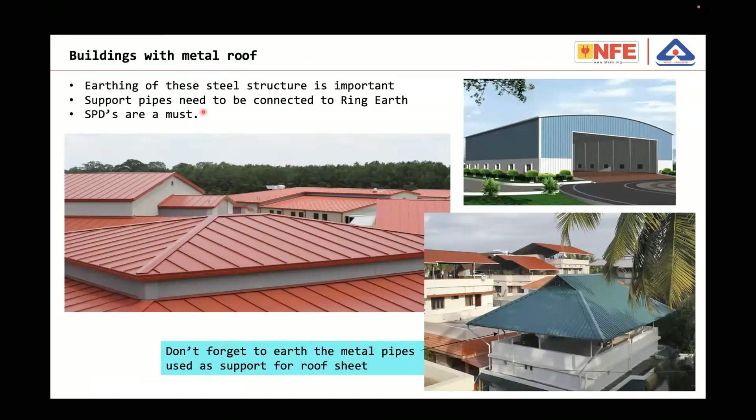Buildings with metal roof: the metal roof can be used as an air termination system, provided it meets the requirements of the minimum thickness, for example, which is mentioned in the standard.

Let's say, for example, the typically used sheet in India is the galvalume sheet, galvanized sheet, normally 0.4 mm or 0.47 mm. So practically, in case of a lightning strike on that particular sheet, there can be a puncture.

If you can manage your building with the puncture, then you don't need any air termination system. But if you cannot - say, for example, you have an industry, an explosive area, or a critical installation, and you cannot afford to have a puncture - in that case you need to have an additional air termination system connected to the metal roof of the building.

Some of the accessories used, for example, in an industrial building: there is a mesh, and the mesh is directly connected to the roof sheet. But sometimes engineers have some kind of apprehension about this.

They say don't use any metallic conductor, use an insulated conductor instead. But sometimes we are forced to use insulated conductor because people think that lightning current will flow over and through the air termination and down conductor. It is actually not correct. You need to have metallic conductors directly mounted to the sheet.

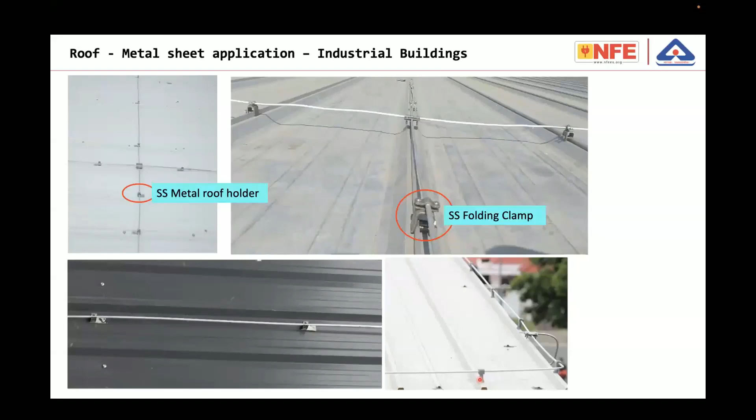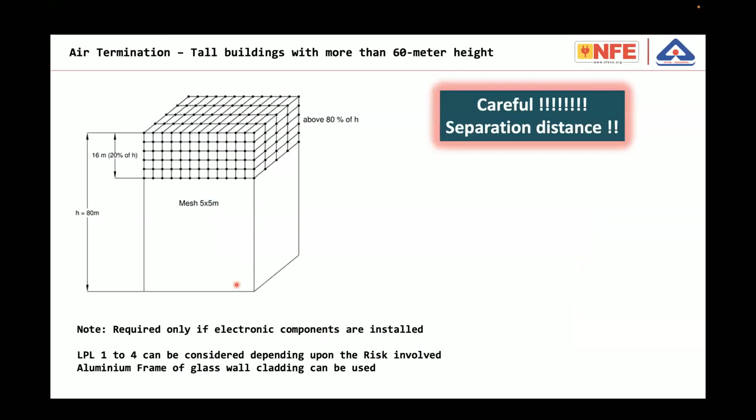High-rise buildings need, number one, separation, and number two, a mesh at the top 20% of the building in order to avoid side flashes. We will discuss this probably in the next webinars.

Similarly, a typical building needs multiple down conductors. The maximum distance between down conductors is specified in the standard. You see, this is a building with so many down conductors, and down conductors have to be all around the building. It is not like you route all the down conductors through one place.

No, it has to be throughout the building. It has to be outside the building. It has to be straight without bends if possible, and not through shaft, especially electrical shaft.

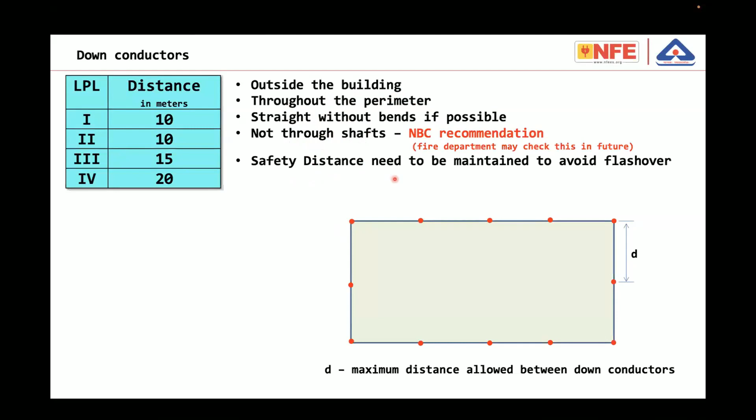So similarly, let me skip this. The separation distance, we will go through it later. Let me go to the last part, the earth termination, and try to close today's program.

Every building needing a lightning protection system needs an earth termination system. There are two types of earth termination or earth electrodes mentioned: Type A and Type B. Type A can be vertical or horizontal earth electrode. Basically, this is an earth electrode which is isolated from the building, away from the building, either a vertical rod or a horizontal conductor. Type B consists of a ring earth electrode or a foundation mesh earth electrode. We will discuss it in detail in a later presentation.

Now we are almost 12:30. We will be having some questions and try to answer them and close the webinar. Now, for the earth termination system, what is important for you is: for residential small buildings without much electronics, Type A earthing can be used, meaning vertical rods. For larger buildings, also for critical buildings with a lot of electronics, Type B earthing is mandatory, meaning industrial buildings are supposed to have Type B earthing. We will discuss Type B earthing probably in our next webinars.

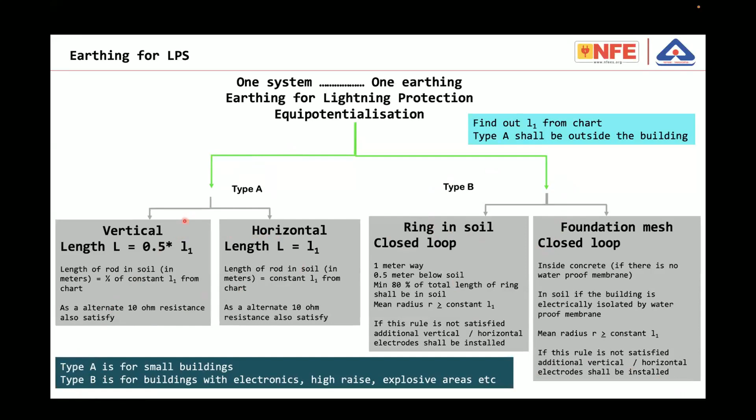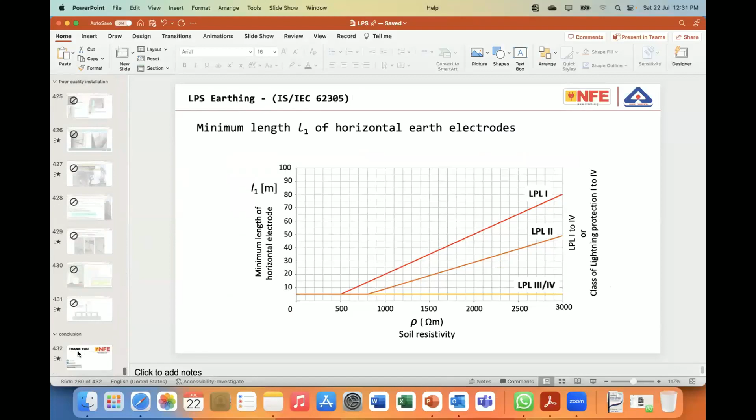Thanks to you, participants. Thank you, sir. Can you put up your screen with the last slide showing your contact number and email, because a lot of people in the chat box want to contact you for some more advice, some wanted solutions, how do we conduct surveys, what is the best solution, how do we design. Many people are asking. I got very good feedback, it was one of the best, excellent presentations they have seen in recent times, so a lot of appreciation in the chat box.